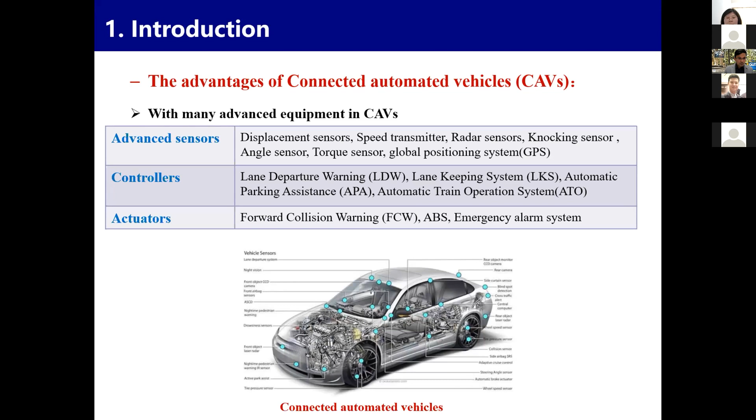Connected automated vehicles combine the Internet of Vehicles and intelligent vehicles, so they have some advantages. First, they are equipped with advanced sensors, controllers, actuators, and other devices that are integrated with modern communication and network technology. Second, through vehicle-to-vehicle, vehicle-to-infrastructure, and other communication methods, connected automatic vehicles are capable of complex environmental perception, intelligent decision-making, and collaborative control.

Further, data shows that connected automatic vehicles can correct the wrong behavior of drivers in the driving process and reduce traffic accidents by 90 to 95%. The economic loss from accidents was reduced by 48% in a connected automatic vehicles test from Huawei company.

Therefore, studying a rear-end early warning method for connected automatic vehicles is a prerequisite for the development of vehicle-loading rear-end collision warning systems. The use of such a method will be of great significance in reducing traffic accidents.

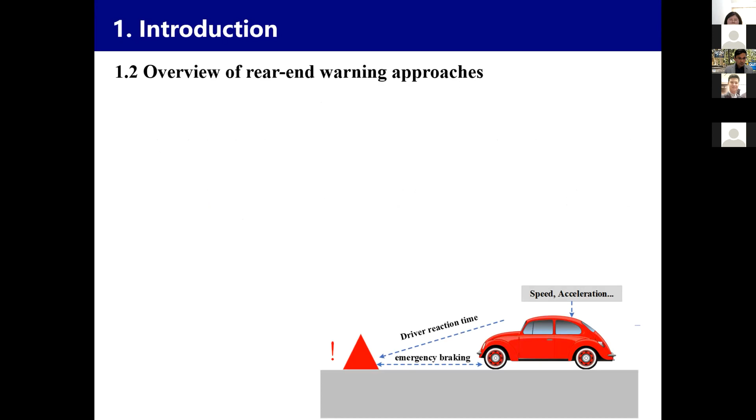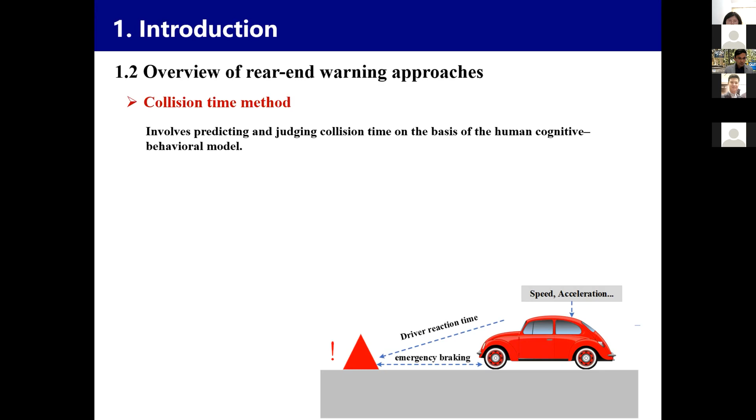Because we aim to research the rear-end warning method for connected automatic vehicles, we overview the rear-end warning approaches first. Existing research has focused on the collision time method and the safe distance model. In the model, the reaction time of emergency brake is calibrated by simulating a driving test. Other influence factors, including driver reaction time and vehicle parameters, have been introduced to design a safety distance model.

With the development of vehicle-road collaboration technology, the safe distance model has been widely used in collision warning modeling and construction systems. Vehicle-road collaboration technology can realize an information exchange between vehicles. A rear-end collision and lateral collision early warning model was proposed with time, position, speed, distance, and braking distance used as parameters.

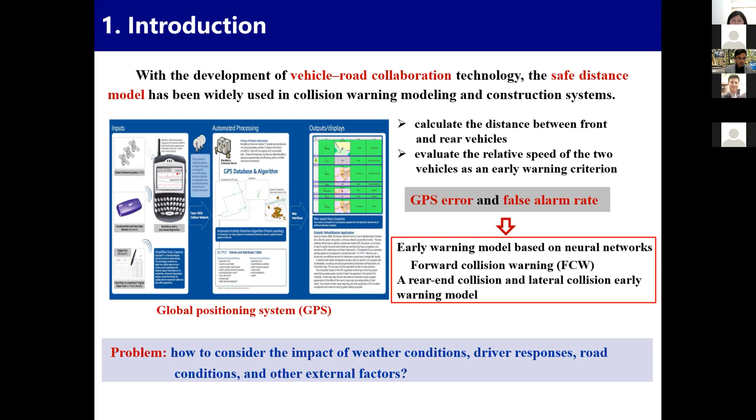In summary, most previous workers have only considered the impact of vehicle parameters on rear-end collision between vehicles, but they have not fully considered the impact of weather conditions, driver response, road conditions, and other external factors. These factors are incorporated into the influence of car following behavior. That is to say, it is necessary to overview the existing car following models like the IDM model and OV model.

These above-mentioned models have different modeling values and application areas, which have promoted the development of research on car following behavior. However, connected automatic vehicles have their own characteristics. They can acquire all kinds of driving state information from multiple vehicles in a timely and accurate manner through advanced sensors and communication devices. They can also adjust their running states based on their devices to stabilize traffic flow and reduce traffic congestion. Thus, constructing a car following model in which the complexity of traffic systems can be described is worthy of research.

Considering the interaction characteristics of connected automatic vehicles, the random factors of traffic systems, and the complexity of car following behavior, we intend to establish a stochastic local multi-vehicle optimal car following model of connected automatic vehicles with multi-vehicle information interactions.

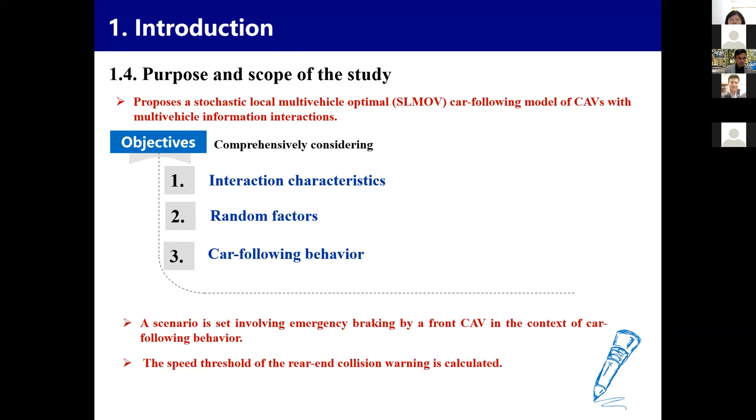On this basis, a scenario is set involving emergency braking by a front connected automatic vehicle in the context of car following behavior. Then, the speed threshold of the rear-end collision warning is calculated. Now, I'd like to turn to introduce the methodology part.

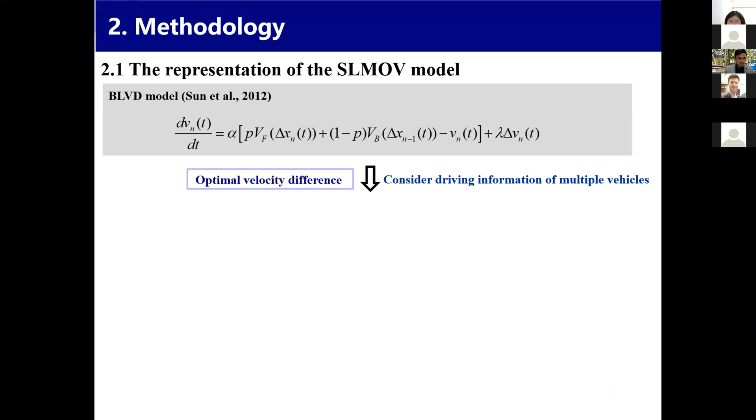Our model is based on the BLVD model, which was proposed by Sun in 2012, with this equation formation. However, the connected automatic vehicle perceives not only the surrounding information, but also the information outside the visual field through radar, camera, and vehicle communication equipment at the perception level. So we propose a local multi-vehicle optimal velocity model like this formation.

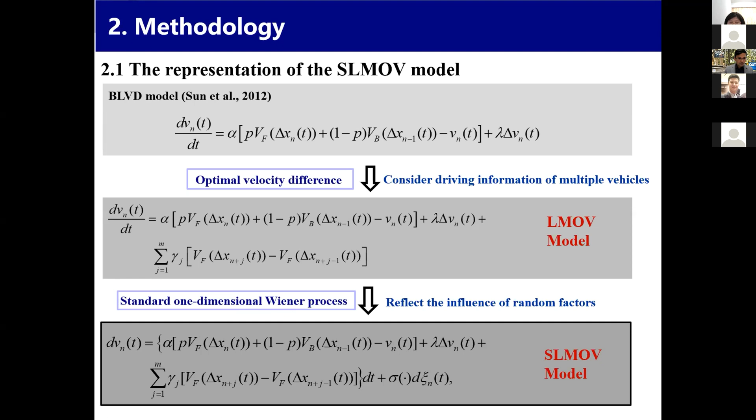Simultaneously, the entire traffic system is considered a dynamic and stochastic system with typical stochastic characteristics, and the sources of randomness mainly come from the road environment and the drivers. Stochastic processes are adopted to describe the influence of random factors. Therefore, standard one-dimensional Wiener processes are introduced in the LMOV model, named the stochastic local multi-vehicle optimal velocity model, like this formation.

Since the SLMOV model is composed of deterministic and stochastic parts, a parallel estimation method is established. For the deterministic part, the nonlinear programming estimation method is introduced. The mean absolute error is chosen as the objective function to be optimized, which means the difference of the predicted value of vehicle velocity and the corresponding true value of velocity.

For the diffusion coefficients, we adopt the concept of regression analysis. The detailed steps are: step 1, a time series forecasting model is established, and the second step, a group of optimum weights is obtained by using the adaptive filtering method, and then the diffusion coefficient values are predicted.

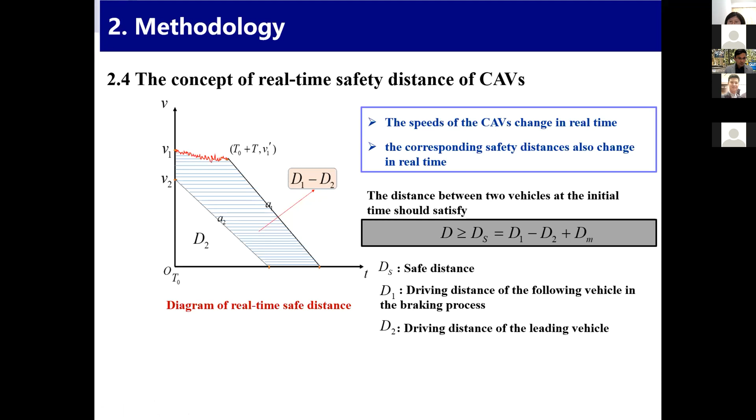Based on the above-mentioned emergency braking process, and given the influence of random factors, the speed of the CAVs changes in real time, and the corresponding safety distance also changes in real time to ensure that the distance between vehicles is greater than the minimum allowable distance dm during the whole braking process. The distance d between two vehicles at the initial time should satisfy this inequality. According to the dynamics formula, the driving distance of the following vehicle during the braking process is this equation.

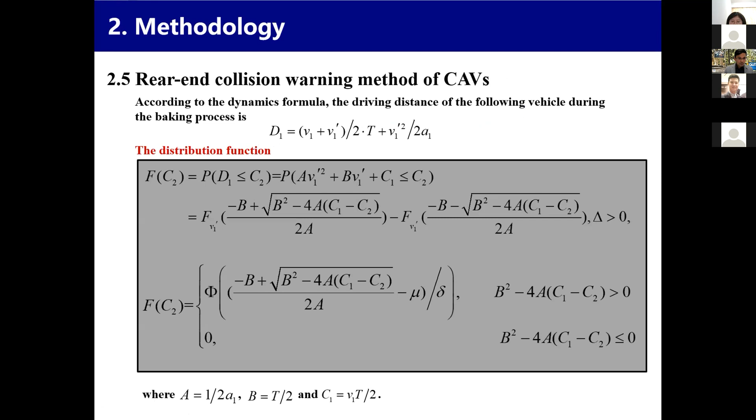Then D1 is a random variable. According to the definition, the distribution function can be calculated by probability theory. From the definition of the safe distance, when D1 is smaller than D plus D2 minus Dm, the status is safe and can avoid the occurrence of a rear-end collision, so P0 stands for the probability of safe status.

V1 and the critical status satisfy this equation. Its solution can be used to obtain the maximum critical value V max of the initial velocity of the following vehicle and the safety probability P0. Comprehensively considering the vehicle safety and the comfort of drivers, we give these methods to set a reasonable interval of velocity adjustment for connected automatic vehicles.

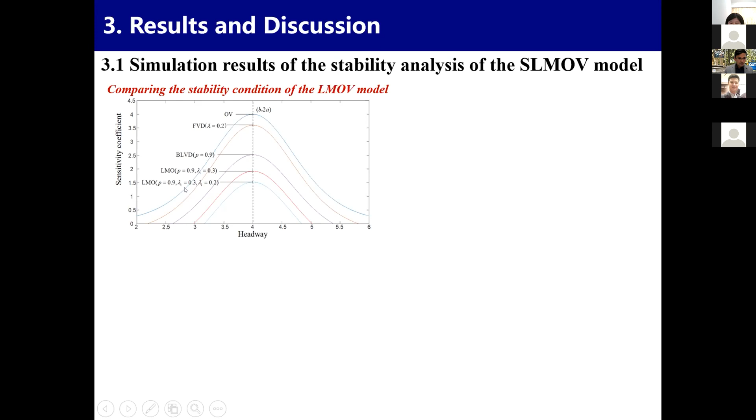Okay, I'd now like to move on to the results and the discussion part. The stability analysis results are divided into 3 parts. First, this figure illustrates that the stability curves of the models from high to low are arranged as follows: OV model, FVD model, BLVD model, LMOV model when M is 1, and LMOV model when M is 2. The comparison results mean that the stability of traffic flow can be theoretically improved by considering the rear-view effect, multiple front vehicle information, and optimal velocity difference information of leading vehicles.

The simulation results show that the fluctuation of vehicle velocity is small in the 6 groups of simulation experiments with different parameters. It can be seen that the fluctuation range decreases with time by comparing the distribution of vehicle velocity at different times in each group. Therefore, the LMOV model with appropriate parameters can gradually dissipate the influence of small disturbances to achieve the stabilization of traffic flow, which is consistent with the stability critical curve in the left figure.

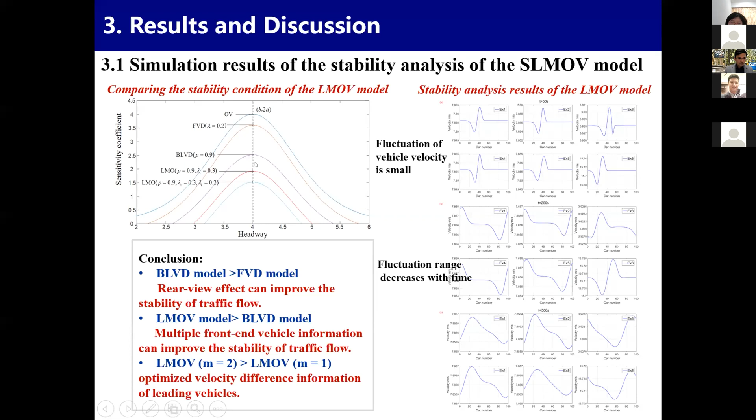From this figure, results indicate that different road environments have a certain impact on vehicle speed in the car-following model. When the intensity of stochastic fluctuation is small, the system can maintain stability through self-regulation. However, when the intensity of stochastic fluctuation is extremely large, the stability of the system may be compromised, and the stop-and-go phenomenon emerges.

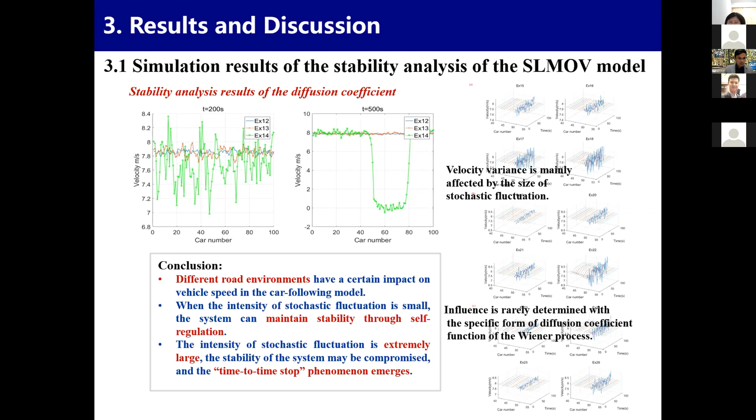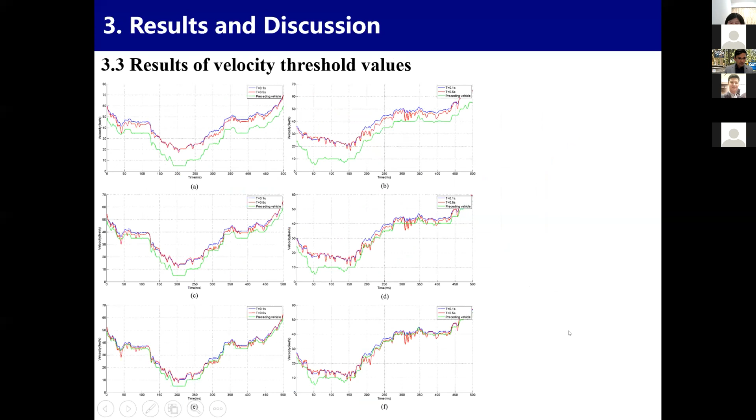This figure shows that the threshold curve of the following vehicle velocity is almost higher than that of the leading vehicle velocity under the above vehicle adjustment time interval. The results indicate that under the corresponding conditions, the following vehicle's velocity can be appropriately higher than that of the leading vehicle, and the following vehicle can thus avoid a rear-end collision with the leading vehicles. Simultaneously, the velocity differences between the leading vehicle and the following vehicle decrease when the brake deceleration levels drop.

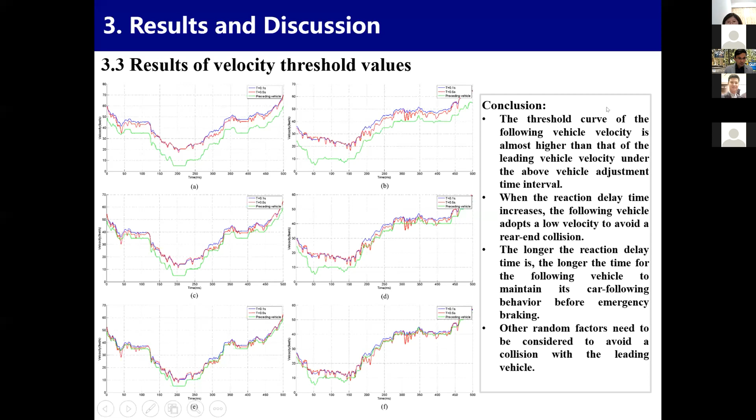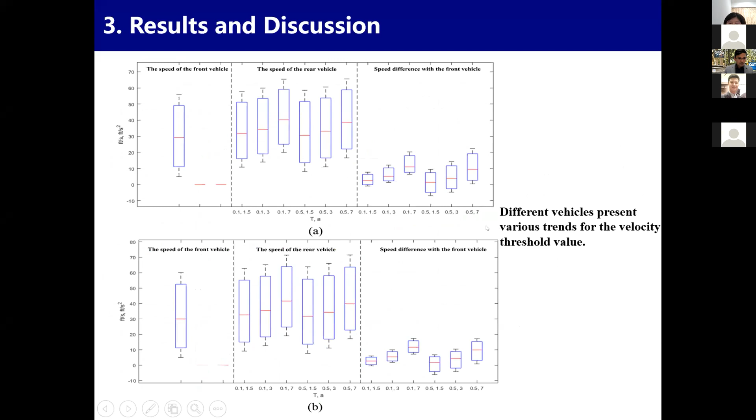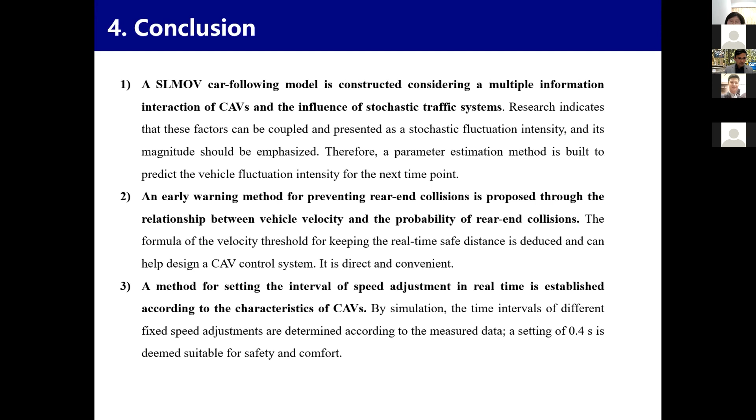Okay, that brings me to the end of my presentation. This work reaches the following 3 conclusions. First, a SLMOV following model is constructed considering the multiple information interaction of connected automatic vehicles and the influence of stochastic traffic system. Research indicates that these factors can be coupled and presented as a stochastic fluctuation intensity. Second, an early warning method for preventing rear-end collisions is proposed through the relationship between vehicle velocity and the probability of rear-end collisions. Third, a method for setting the interval of speed adjustment in real time is established according to the characteristic of connected automatic vehicles.